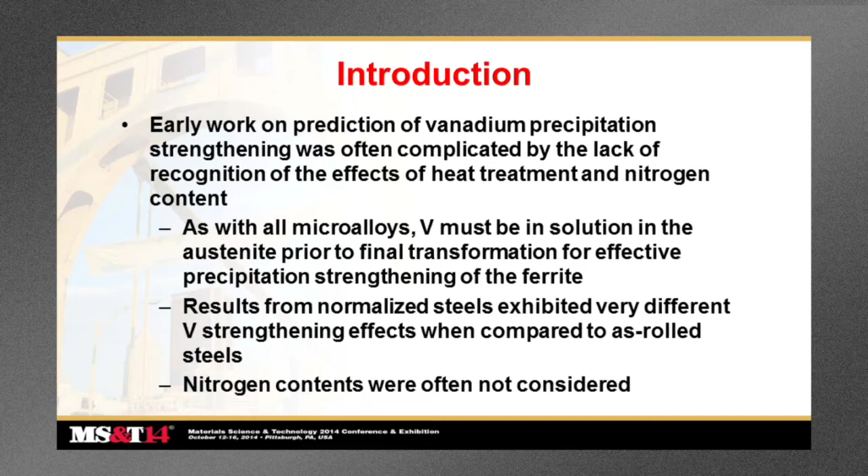Early work on prediction of vanadium precipitation strengthening was often complicated by the lack of recognition of the effects of heat treatment and nitrogen content. As with all microalloys, vanadium must be in solution in the austenite prior to transformation for effective precipitation strengthening of the ferrite. Results from normalized steels exhibited very different vanadium strengthening effects when compared to as-rolled steels, and often nitrogen contents were not considered.

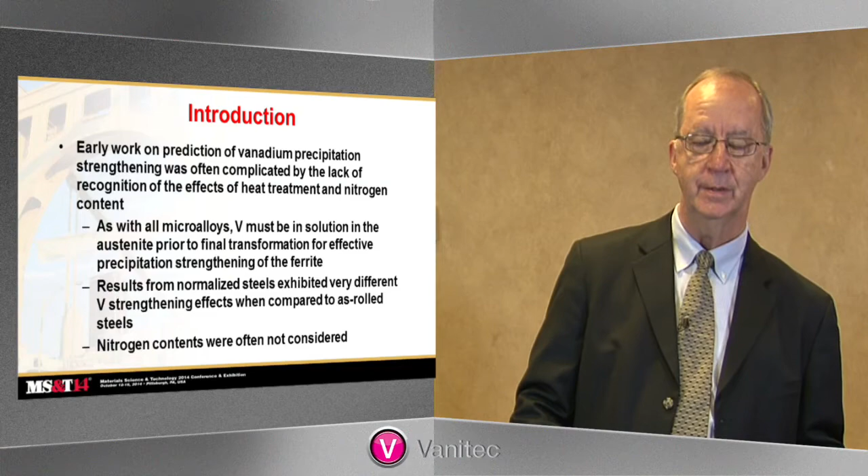This resulted in some somewhat different perspective of what the strengthening effects of vanadium additions were, certainly some confusion and misinterpretation of data that was available.

Grozier in 1975, at the Microalloying 75 Symposium, really started microalloying, which Mike Korchynsky was a very prominent contributor to. In that conference, Grozier presented some of the first results of extensive production of vanadium strengthened hot rolled strip steels. In there, a graphical model was used to describe the effects of vanadium and nitrogen on the as-rolled yield strength. This strength model was first published by Korchynsky and Stuart in 1970.

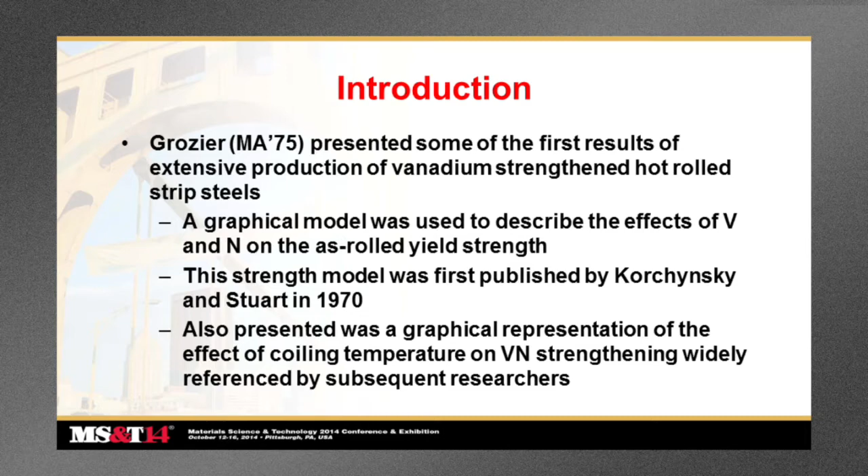Also presented in that conference was a graphical representation of the effect of coiling temperature on vanadium nitrogen strengthening, which has been widely referenced by subsequent researchers over the years.

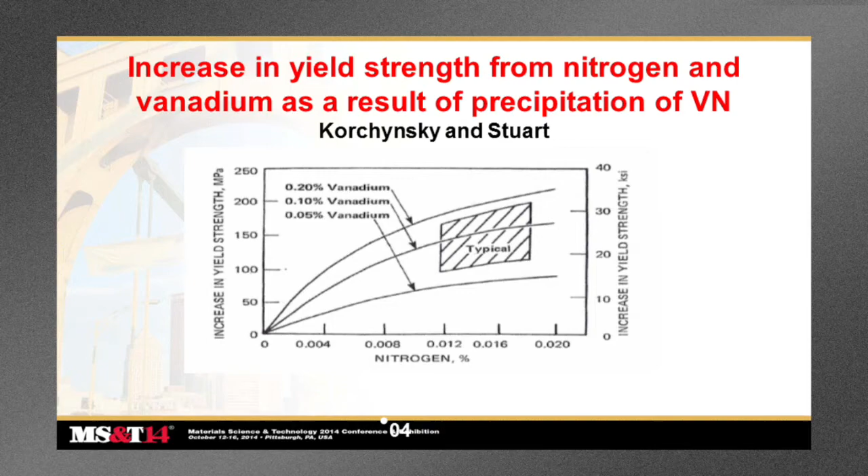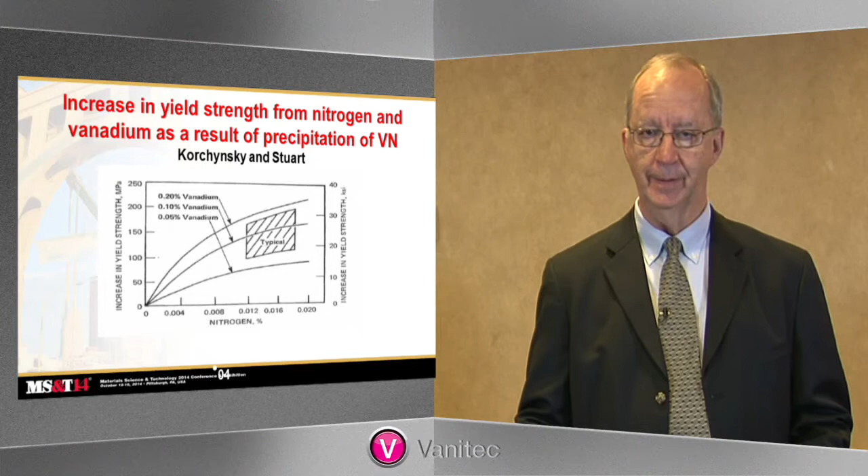This is the graph first published again by Korchynsky and Stuart, showing the strengthening effect, that is the increase in yield strength as you see on the left, for increasing nitrogen levels, for three different levels of vanadium addition. This again is quoted and cited widely over the years as being the first real representation and information to the industry that the vanadium nitrogen system could be very effective.

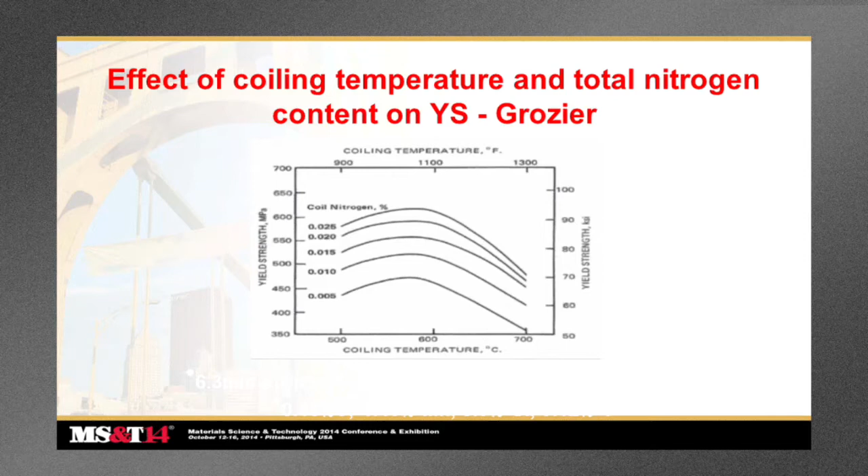But the problems with this graphical model, the first graph that I showed, included a number of things. First, there's no vanadium strengthening apparent at 0% nitrogen. In other words, hypothetically, a 0 nitrogen steel would still have some strengthening from a vanadium addition because presumably carbon would be available interstitially.

But in this graph, it doesn't represent that. It all starts from the 0 point. Forcing these curves to start at the 0 point causes the nitrogen strengthening slopes to be considerably different depending on the vanadium level. The nitrogen strengthening rate, therefore, varies significantly at these different levels, which isn't necessarily consistent with what subsequent research has shown.

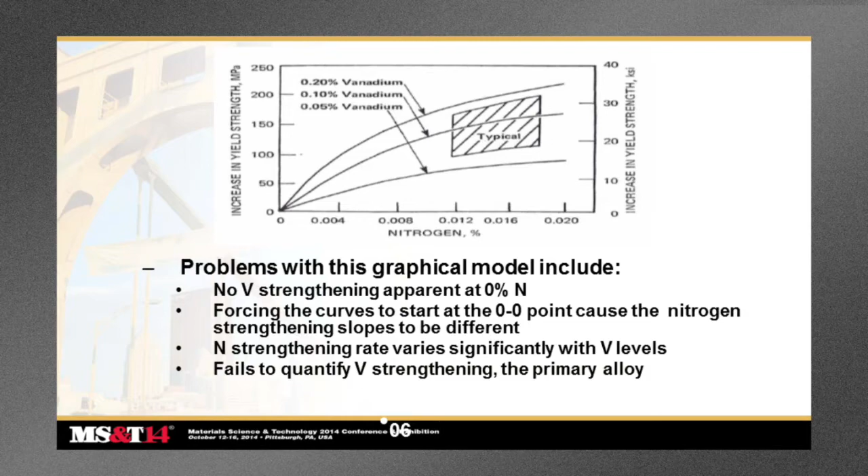It also fails to quantify vanadium strengthening, which is the primary alloy being used by the metallurgist in their alloy design. They need to know how much vanadium they need to get to the strength that they want. And it's difficult to tell from this curve simply because vanadium content is not one of the variables of the graph.

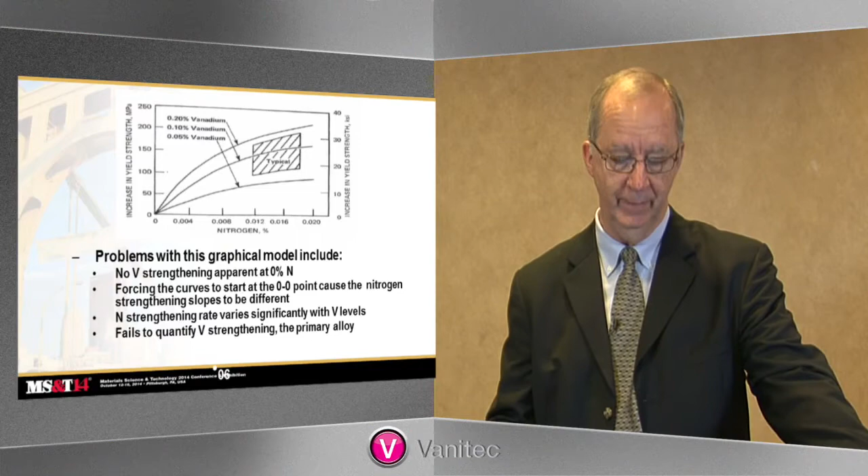Subsequent to that work, there's been much more work - I will refer to the work by Siwecki and others on nitrogen, the effect of nitrogen on precipitation strengthening. In this case, a 0.12 carbon, 1.35 manganese material, as you see, with aluminum and 0.09 vanadium.

In that case, the graph clearly showed that there was a linear strengthening response to the increasing nitrogen levels, and that this slope was consistent with different processing variables, which changed the absolute strength level, but the strengthening increase from the nitrogen contribution, as you can see, as we go from 50 to 120 to 180 region, that strengthening contribution was consistent across all of these processing and cooling rate conditions.

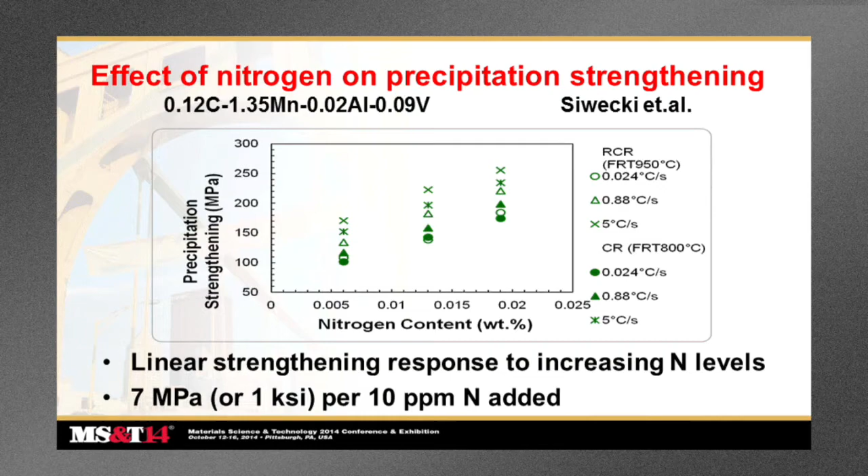This rate of strengthening was about 7 megapascals, or 1 KSI in inch-pound units, per 10 ppm nitrogen added. It turns out that this number has been repeated time and time again by multiple researchers and also many commercial applications of this alloy system - that 7 megapascal increase in strength for 10 ppm nitrogen added, as long as it's substoichiometric to the vanadium nitrogen stoichiometric ratio.

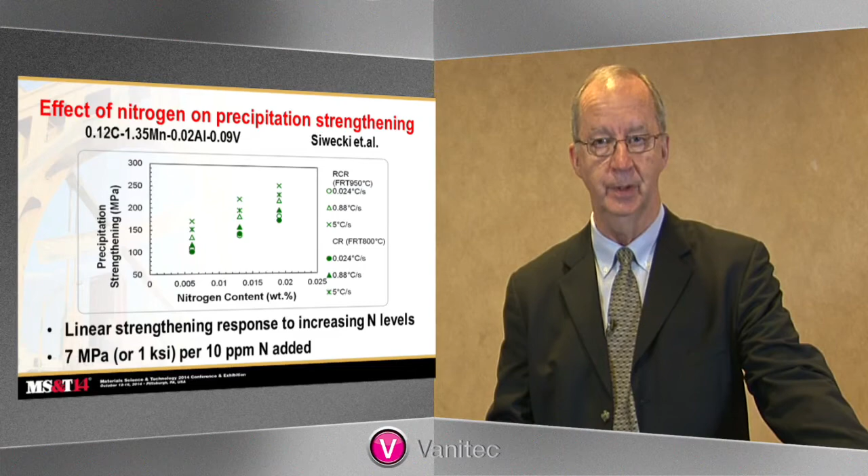The objective for improving the model then was to develop a descriptive graphical model of vanadium nitrogen strengthening that would have visual impact for sure, and also that vanadium should be the primary variable, so you can then quantify the relative effects of vanadium and better design your alloy content.

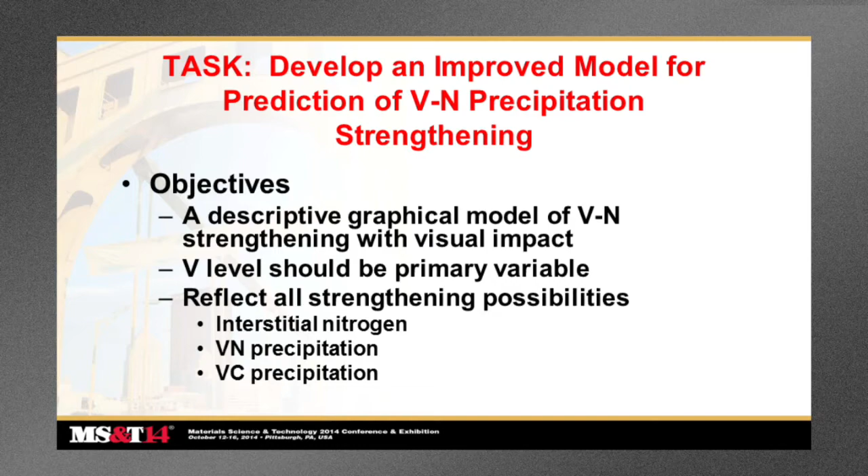And it should also reflect all strengthening possibilities, and those include vanadium nitride precipitation and vanadium carbide precipitation, and of course, therefore, has to be a function of the presence of both interstitial nitrogen and carbon.

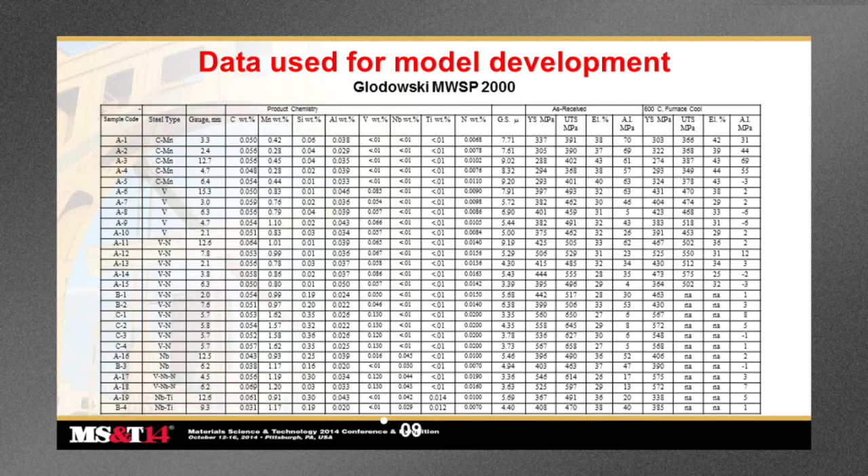Data used for model development included this information. I don't intend to go over that, just to show you roughly the kind of information that's available. It is not intended to be analytically rigorous, but simply to generate a descriptive model that could be used across many different applications. The regression results, as shown, again, were not necessarily rigorous, but they were compared with many different actual production data sets and found to be very descriptive of what is actually being observed.

And it also agrees with this 7 megapascals per 10 ppm nitrogen level addition that would be expected to get with the nitrogen assistance to the vanadium precipitation.

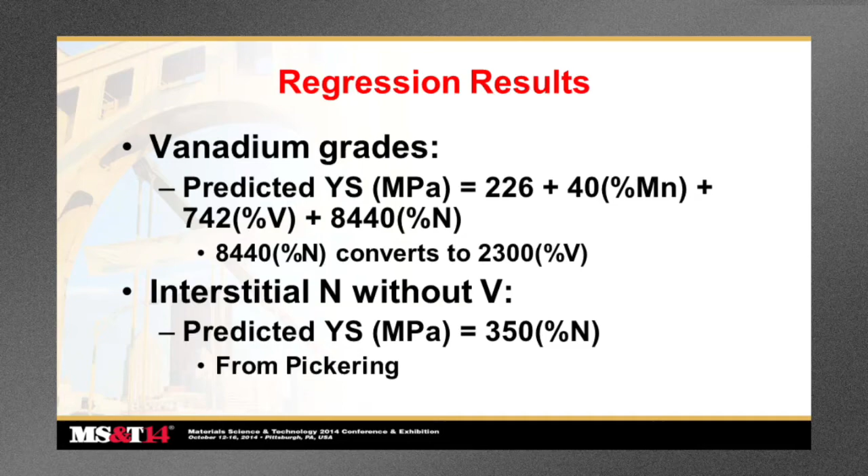You also had to develop this model, had to develop some prediction of what the effect of interstitial nitrogen might be without precipitation. In other words, if you have nitrogen without vanadium, what kind of strengthening could you get? We used the model that was suggested by Pickering, as you see here. I think subsequent to this, there is strong evidence that says that model probably underpredicts the interstitial nitrogen strengthening component, but nitrogen strengthening, interstitial nitrogen strengthening is not something that would normally be recommended, and so it's not a major issue with the predictive model.

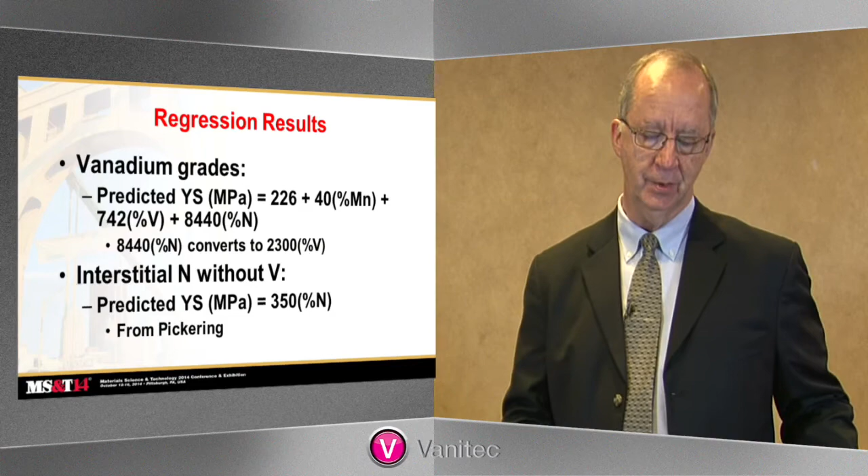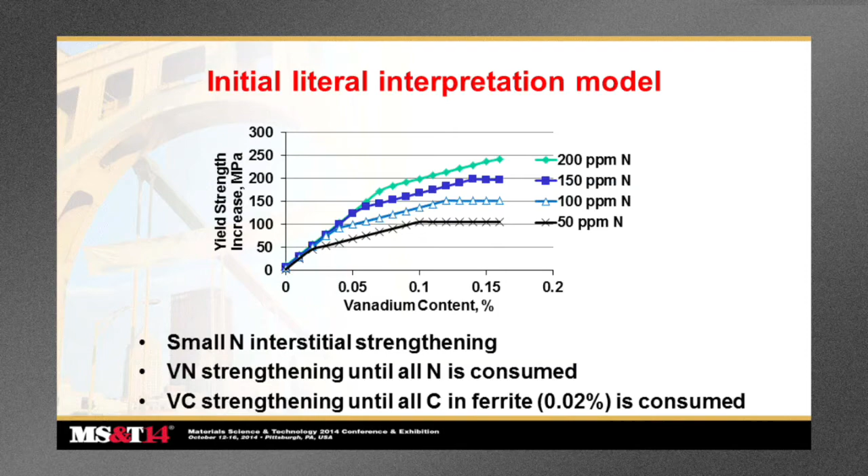Now, there can be many different carbon levels of steel that you can use this system with, but we have to remember that it's only the carbon in the ferrite that will precipitate and give you vanadium carbide strengthening. Precipitation of vanadium carbide in the austenite, if it happens, which is not particularly likely anyway because of the high solubility of vanadium carbide, but even if it did, it would not contribute to strengthening.

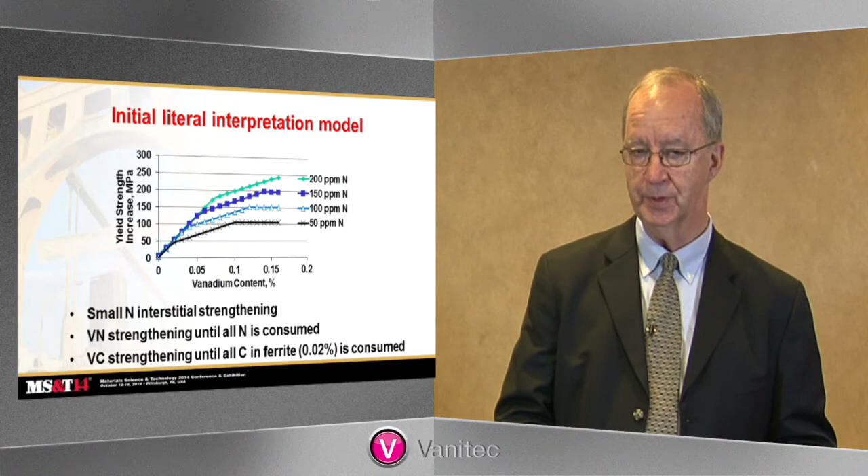So you have the first slope, which is vanadium nitrogen strengthening. The second slope is vanadium carbide strengthening, but we have to remember the maximum solubility of carbon in iron ferrite is about 0.02%. So you can also run out of carbon. So eventually, stoichiometrically, you will run out of carbon as well. So you first can form vanadium nitride, then vanadium carbide, and then there is really no other interstitial element left for the vanadium to precipitate to contribute to precipitation strengthening. So it simply stays in solution and the precipitation strengthening component essentially stops.

Now looking at that literal model, as I called it, and comparing it to the Korchynsky model on the right, you can see at roughly the same axis of yield strength increase on the left, that in fact they're very similar. Of course we have now exchanged, we put vanadium content on the lower axis rather than nitrogen content, which then allows you to be predictive in how much vanadium you want to add, and we do that at various nitrogen levels to give you an idea where you need to be with nitrogen content when you're done.

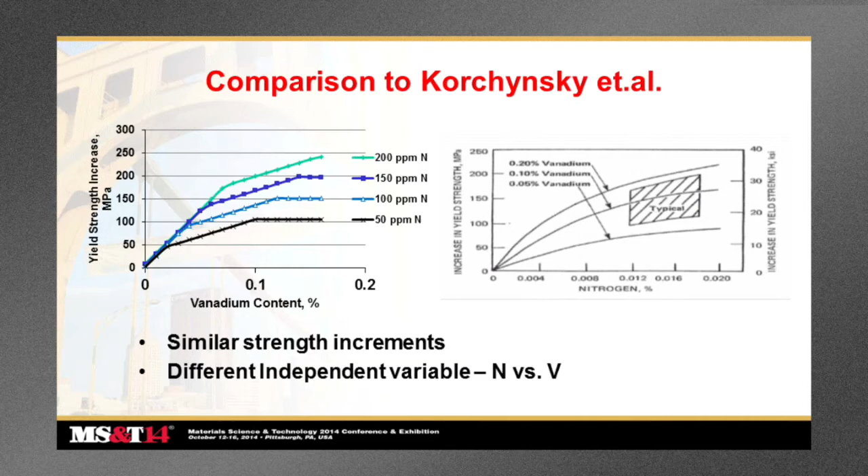As you can see, the more vanadium added, the more nitrogen is needed to make maximum use of the vanadium that you have. Some important points from this vanadium strengthening graph: again, it provides a quick method to estimate vanadium requirements based on incremental strength that you are looking for. It demonstrates the importance of managing the nitrogen level. It reaffirms the fact that precipitation strengthening requires both vanadium and either carbon or nitrogen to be effective.

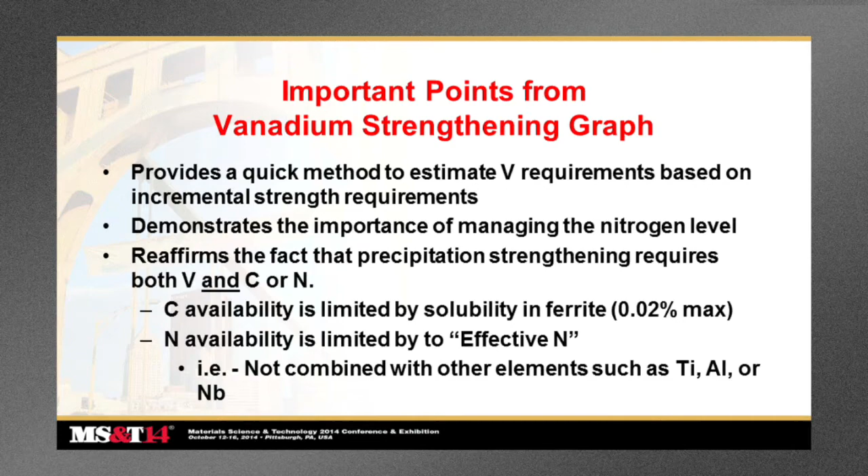Carbon availability is limited by the solubility in ferrite, typically 0.02% max. Nitrogen availability is limited to what the effective nitrogen level is. In other words, it's not necessarily just the total nitrogen, because other elements may combine with the nitrogen prior to it being available for vanadium nitride precipitation in the ferrite.

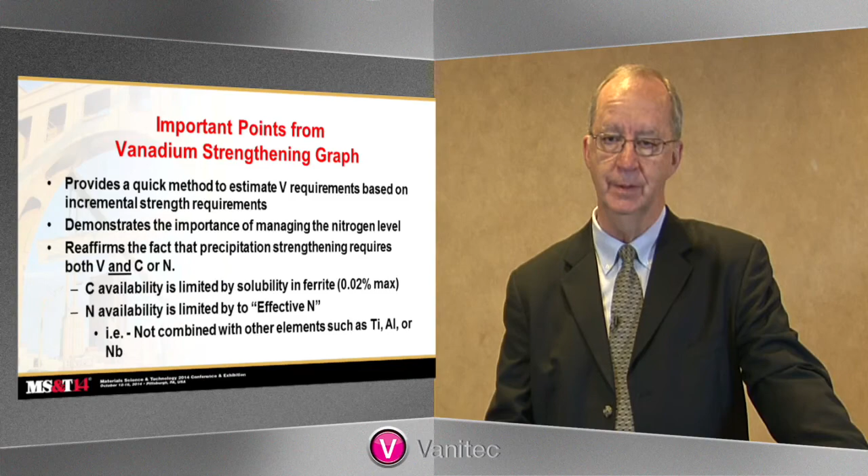The elements that compete with vanadium for combining with nitrogen are titanium, aluminum and niobium. For valid application of this model, we have to keep certain things in mind.

You have to be looking at a situation where all precipitates must be in solution in the final reheat. That means the reheat temperature should be high enough to get all of the microalloys in solution, certainly all the vanadium in solution that you're looking for the precipitation strengthening. However, things like titanium, you may never get back in solution once the steel is solidified. But it does mean the reheat temperature probably has to be much higher than normal austenitizing temperatures for heat treatment, such as normalizing.

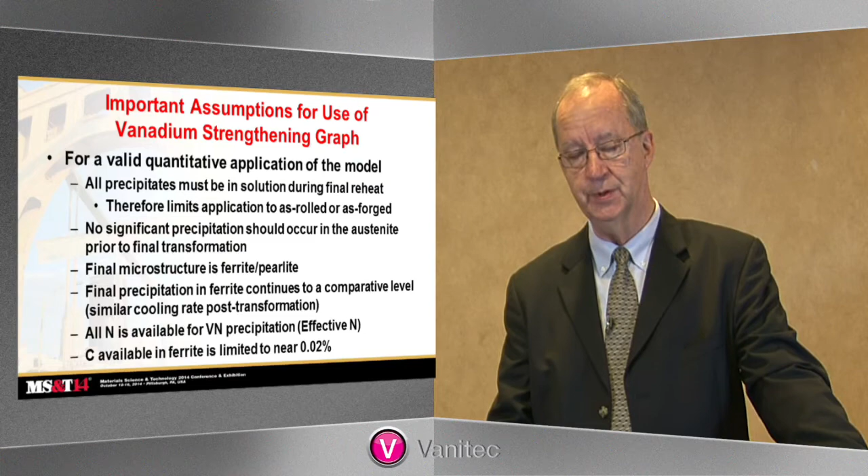So when you normalize material, you can't expect to get the kind of response from vanadium nitrogen precipitation strengthening as we see in this model. It pretty much limits the model to use in as-rolled or as-forged conditions. But that is primarily where microalloying is used, so it's really not an issue, you just have to be aware of that.

Also, no significant precipitation should occur in the austenite prior to final transformation to be able to get this precipitation strengthening. The final microstructure is a ferrite-pearlite microstructure. Final precipitation in ferrite continues to a comparative level. In other words, the processing should be very similar, with similar cooling rate after the transformation has completed.

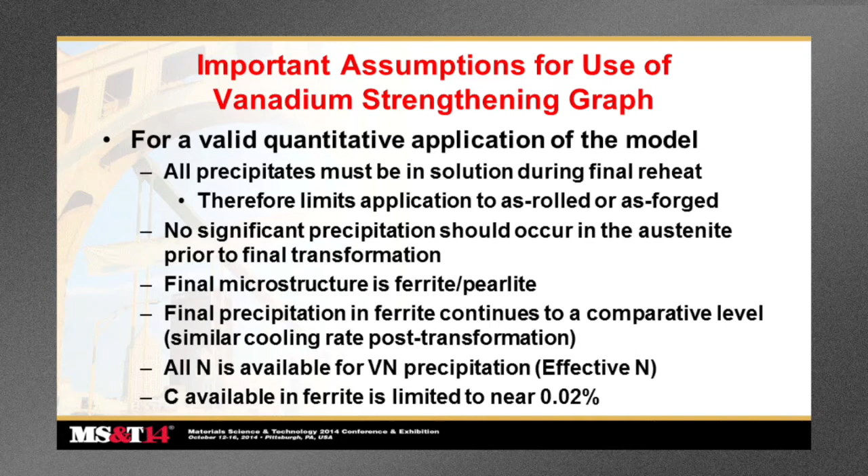And all nitrogen that you presume to be part of this model is in fact effective nitrogen, that is, it is available for vanadium nitrogen precipitation. Carbon availability in ferrite is generally limited to 0.02%, but we will talk about an example where they may be higher than that. This, in fact, is that example.

So you get a ferrite-pearlite kind of structure, but with higher carbon levels you can have higher hardenability, therefore lower transformation temperatures, potential supersaturation of carbon in the ferrite, and therefore a higher driving force for vanadium carbide precipitation and more carbon being available.

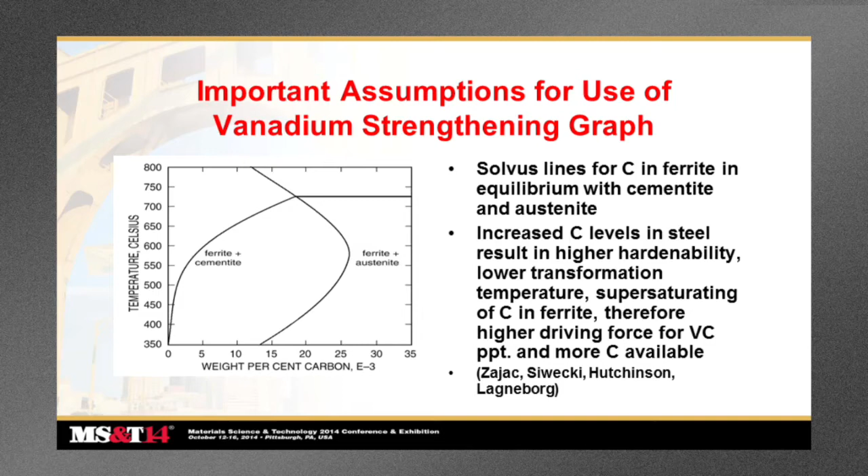As a result of this supersaturation of carbon in the ferrite, you may extend the vanadium carbide strengthening component to higher vanadium levels. So the rate of strengthening will still remain the same as shown in that curve, and the nitrogen strengthening component, the 7 megapascals we quote, is still relevant and appropriate for these intermediate carbon levels. The differential increase you can get with nitrogen, as long as it's substoichiometric to the VN ratio, is always consistent near that 7 megapascals if appropriately processed.

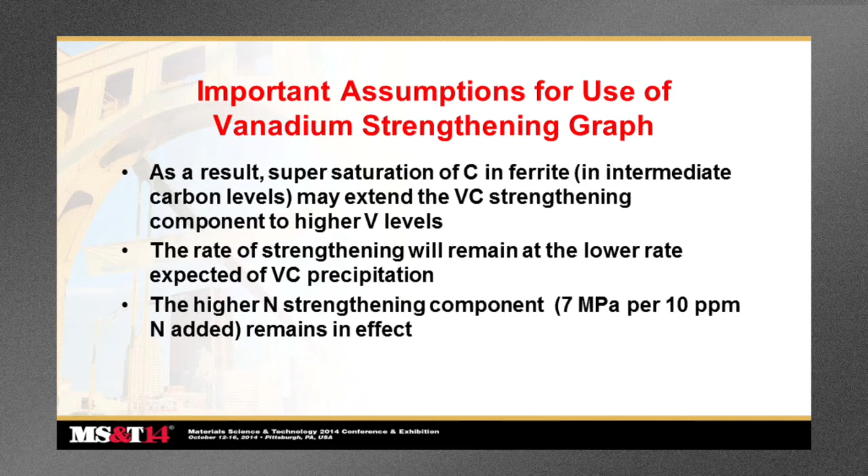One of the things we've seen with this modeling is that it really isn't critical whether the precipitation is interphase or random. It still quantitatively contributes to strengthening at about the same predictable rate.

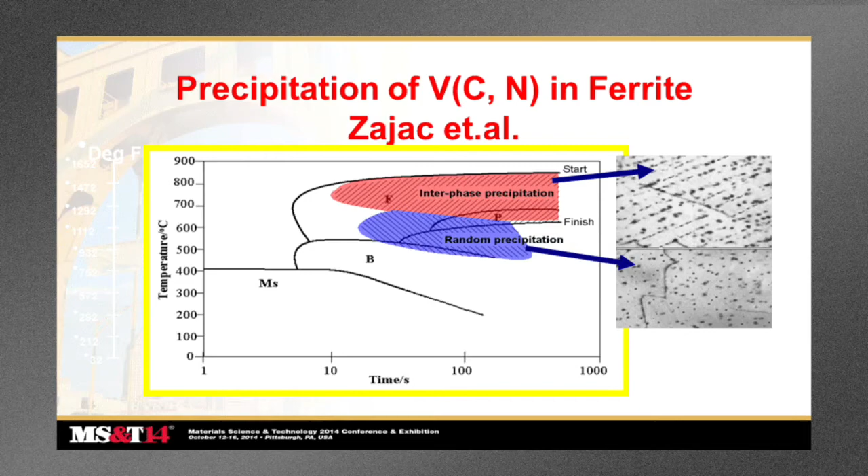However, looking at this curve reminds us of a couple of things. One is that precipitation in the austenite, prior to reaching these transformation lines up in this zone, does not contribute to strength. The second is that the precipitation strengthening does occur at a relatively high temperature, and there is a temperature below which precipitation of vanadium carbonitrides will cease, and you no longer get any effective strengthening if it has not precipitated at the appropriate time.

Typically, most researchers looking at production kind of processing times and temperatures find that anywhere from 50 to 70% of the vanadium will precipitate if there's ample nitrogen available.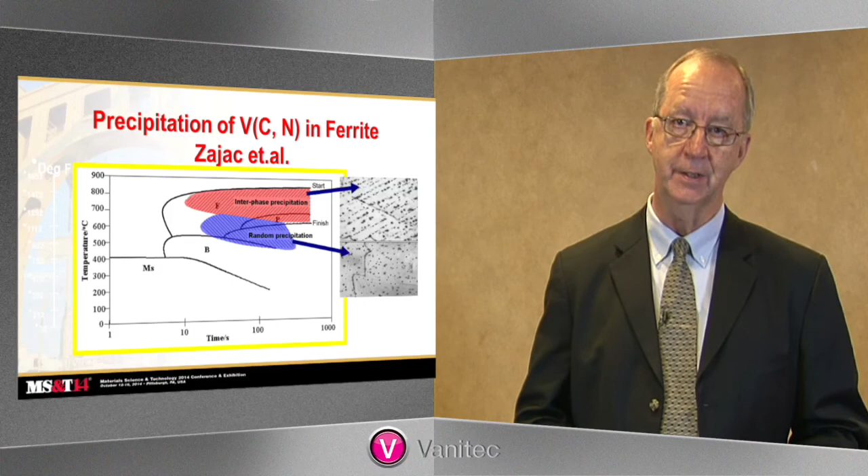If it's only carbon available, typically that number is less than 50%, maybe 20 to 40. That is the primary reason why you see the differential strengthening rates between the vanadium nitride and the vanadium carbide.

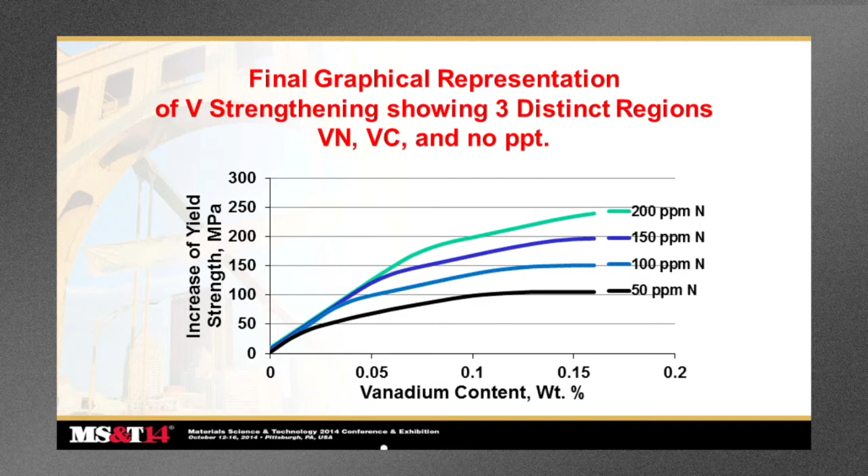We know that nature doesn't work in straight lines, it works in curves. If you tried to generate this model based on actual production data, it would be very difficult to determine where these inflection points are from vanadium nitride to vanadium carbide to vanadium nothing, because there's nothing available. What you'll see is more or less a continuous curve gradually approaching a zero strengthening rate. These inflection points are rounded off in this graph to better represent and estimate what you'll actually see when doing alloy design based on a vanadium nitrogen system.

So the intent of this representation is to provide usable information to those alloy designers out there that want to use vanadium in the most appropriate and cost-effective way.

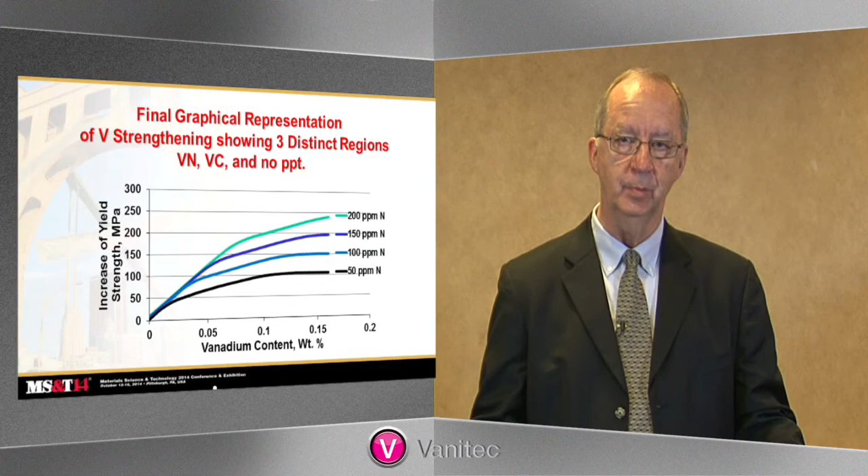Now let's talk a little bit about the solubilities, the relative solubilities of these carbide and nitride formers. This is the classic solubility curve for each of the primary microalloys: vanadium carbide, vanadium nitride, titanium carbide, titanium nitride, niobium carbide, niobium nitride, and aluminum nitride.

As you can see, of all the nitride formers, vanadium nitride is the most soluble. Niobium nitride is next, less soluble. Aluminum nitride is even less soluble for the most part than niobium, but very similar. And then you have titanium nitride that precipitates pretty much on solidification of the steel. It is extremely difficult to get back into solution.

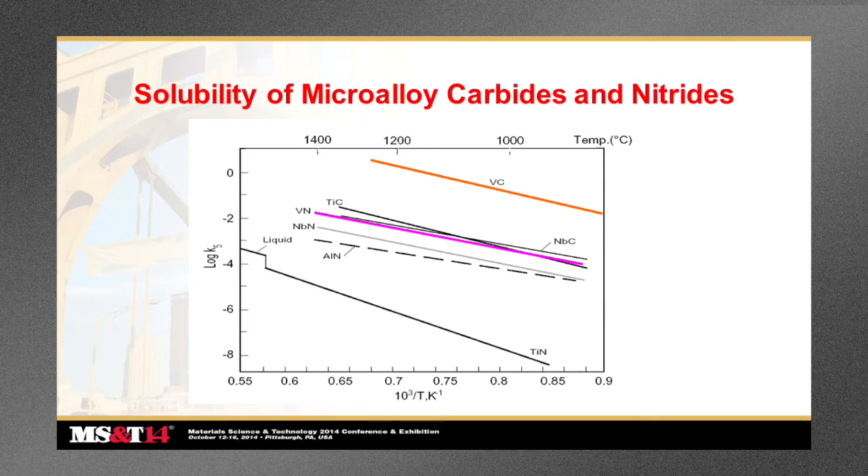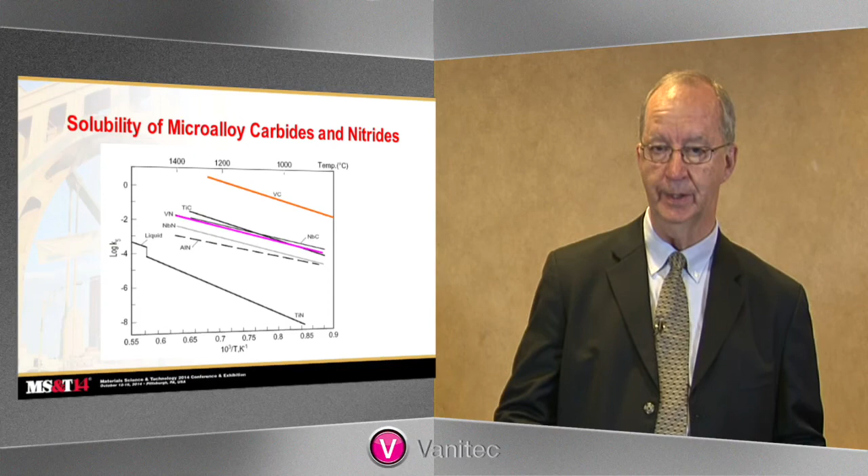So what this quickly shows you is that you are at high risk. If you have any of the other microalloys contained in the steel along with vanadium, you are at high risk of losing that nitrogen to a competing element. So when you look at this strengthening model we just developed, you must determine what nitrogen is truly available. You have to look at the prior processing history and determine how much nitrogen is actually available to precipitate with the vanadium nitride, and from that you can predict what kind of strengthening you might expect to see. Let's look at each of these elements specifically.

We know that titanium nitride can form at a very high temperature. It results in a direct loss of effective nitrogen for vanadium nitride precipitation. Basically you can use a stoichiometric calculation of titanium nitride formation and presume that virtually all of that nitrogen will not be available and will not be part of the effective nitrogen available to the vanadium.

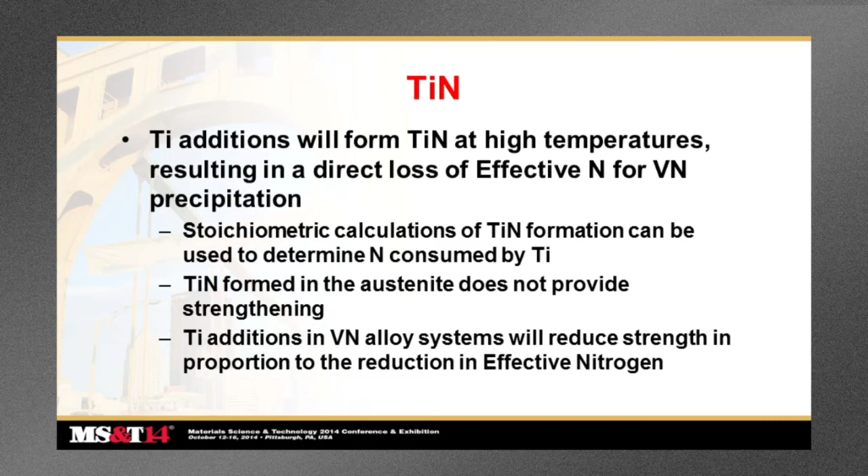The titanium nitride formed in the austenite does not provide strengthening. Virtually all of the titanium nitride forms in the austenite. It tends to be very coarse, not a strengthening size precipitate. Therefore, titanium additions in a vanadium nitrogen system actually reduce the strength in proportion to the amount of effective nitrogen removed. They can possibly be an effective high temperature grain growth controlling precipitate, but they do not contribute to strength after the fact.

Now, when we look at niobium nitride formation, we know it's less soluble than vanadium nitride or niobium carbide. Therefore, niobium additions will likely precipitate before certainly before the vanadium, and even to some degree before the niobium carbide, depending on the carbon level, of course.

Higher nitrogen levels will tend to precipitate niobium at higher temperatures, removing niobium and nitrogen from solid solution. Niobium nitride will promote co-precipitation of niobium carbide and vanadium nitride in the austenite, which is where you do not want it to occur. So in general, nitrogen tends to reduce the effectiveness of niobium microalloying, although it can raise the T sub NR temperature if that's your desire.

But most niobium alloy designs are optimized with as low as possible nitrogen rather than high nitrogen. Nitrogen combined with niobium in the austenite does not strengthen, and it will reduce the effective nitrogen level.

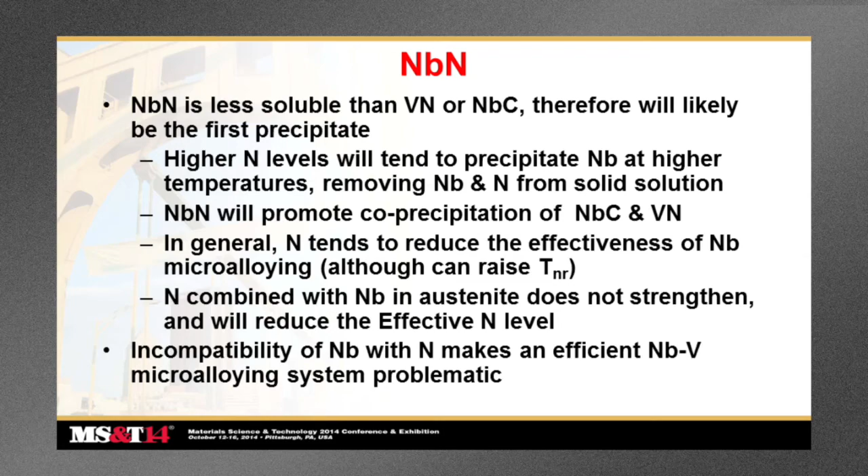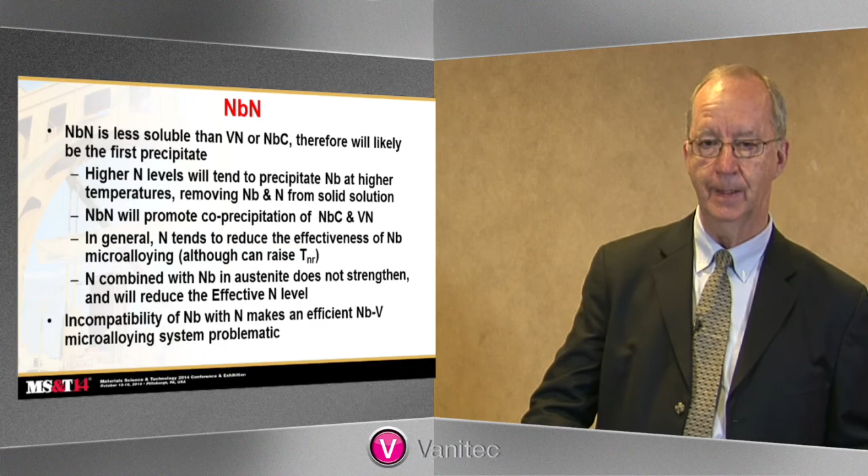This incompatibility of niobium with nitrogen makes an efficient niobium-vanadium microalloying system somewhat problematic, because how do you use the niobium effectively and the vanadium effectively if the niobium combines with the nitrogen before the vanadium, keeping it from forming vanadium nitride, which is what you want for strength. Meanwhile, the formation of niobium nitride actually reduces the effectiveness of the niobium addition in the first place as well. So this lack of synergy between the two is a major issue as we try to make these elements work together, and is something we continue to struggle with.

Here's some examples of the titanium precipitates as well as vanadium precipitates that Yu Li and others have published. The first graph on the upper left shows that in a CSP type operation where the as-cast slab is equalized at 1050 C, these precipitates quickly form and do not dissolve. In fact, because of the pre-existence of the titanium nitride that forms on solidification, vanadium then tends to co-precipitate vanadium nitride around those precipitates.

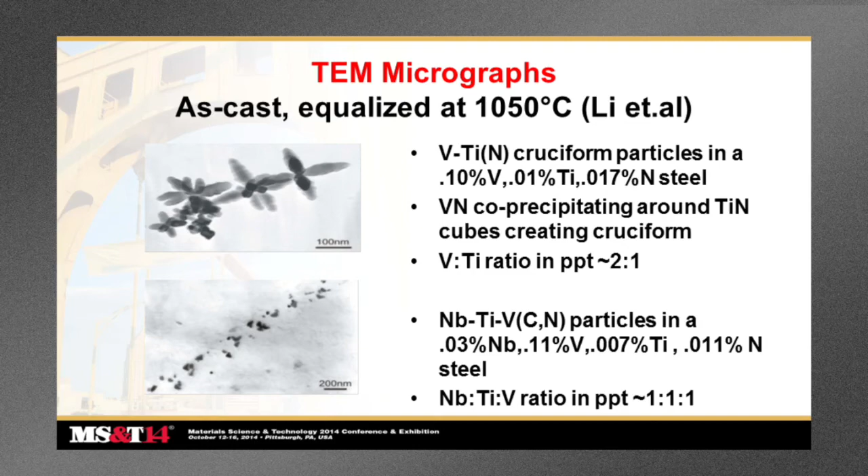Again, taking vanadium and nitrogen out of the system in the austenite where it will not be effective for strengthening. Similar things happen when you combine a niobium and titanium system. You get these precipitates, somewhat lower magnification. These are also relatively large precipitates that don't effectively contribute to strength, and they remove the microalloy that you've added from solution in the austenite, therefore not contributing to precipitation strengthening of the ferrite.

Now, aluminum is also routinely used for deoxidation and meeting fine grain requirements on many of these steels. Aluminum nitride has a lower solubility than vanadium nitride, but aluminum nitride formation is very sluggish on the cooling process. Aluminum nitride does form quickly during a reheat cycle, so conditions during the process where you go through a cycle of cooling down and then reheating, such as on the slab surface during casting, or slab or bloom reheating during, say, the equalizing furnace in a CSP mill.

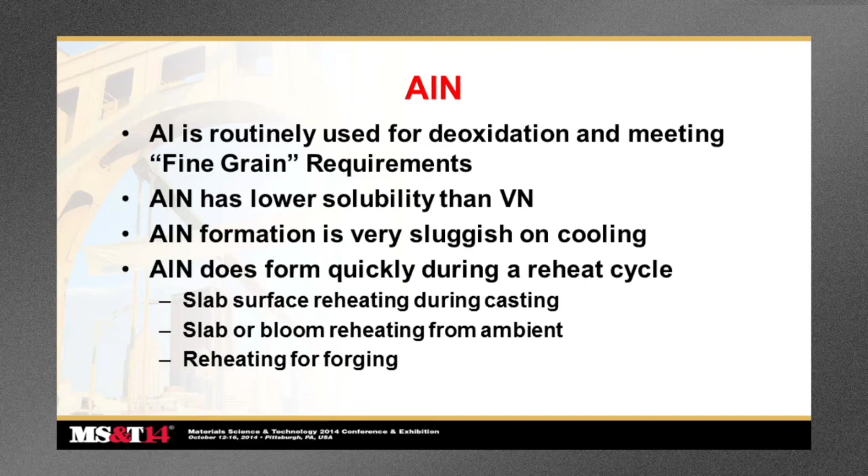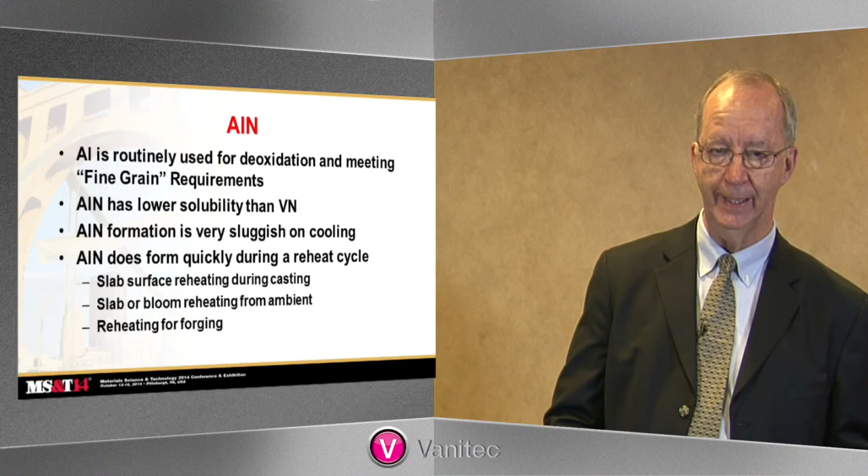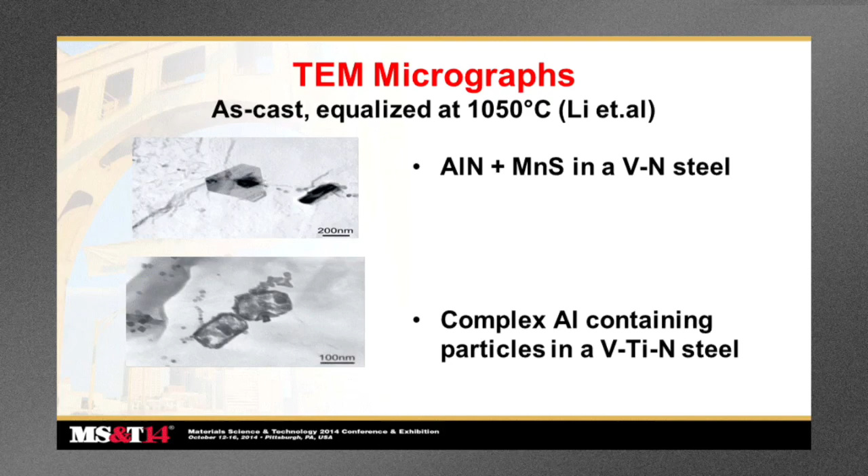All of those are places where aluminum nitride might precipitate, and if it does, it again steals the nitrogen away from the vanadium and is no longer effective for vanadium nitrogen strengthening. This is an example of aluminum nitride formation in a vanadium nitrogen steel and also in a vanadium titanium nitrogen steel, where the aluminum nitride forms and at this point contributes nothing to properties. It does not provide a grain refiner because the grains are already large in this case, and it steals nitrogen away from the vanadium nitrogen system.

Here's another example of the effect of aluminum on interfering with the vanadium nitrogen system. This is work done by Rothleutner and Van Tyne, where they did forging simulations using a base alloy of 0.37 carbon, 0.09 vanadium, and 0.015 nitrogen, with two aluminum levels, 0.006 and 0.031 percent. They varied the forging reheat temperatures and times to get various amounts of aluminum nitride formation in the austenite prior to forging and cooling.

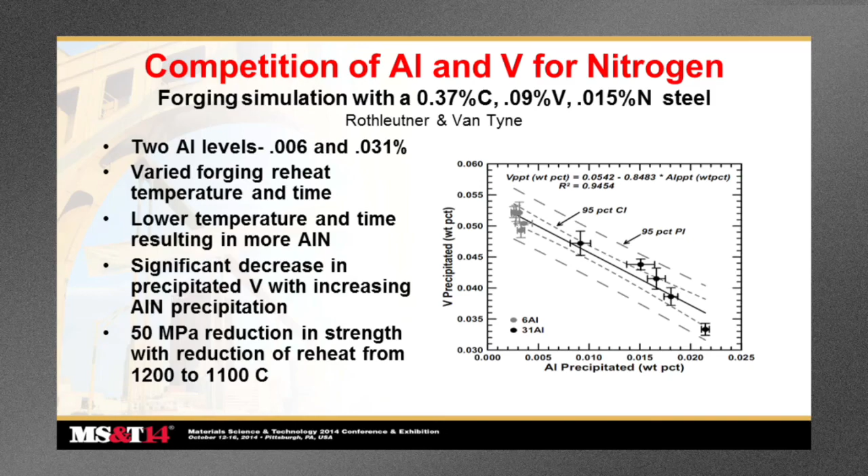What they found, as you can see on the graph, is that as the amount of aluminum that precipitated increases, the amount of vanadium precipitate that occurred decreases. So it was clear evidence of aluminum stealing nitrogen away from the vanadium and reducing the amount of vanadium precipitation, therefore lessening the vanadium nitride precipitation strengthening. In fact, they measured up to a 50 megapascal reduction in strength simply from reducing the forging reheat temperature from 1200 to 1100 C.

We also know that aluminum nitride formation during casting contributes to cracking during unbending. It can contribute to edge cracking in a CSP type operation, where the first roll pass on a thin slab direct rolling process tries to deform the as-cast austenite grain boundaries. If aluminum nitride has formed on those grain boundaries, there will be a significant ductility loss. Aluminum nitride must be dissolved completely prior to rolling, which increases the reheat requirements, a difficulty in a CSP mill.

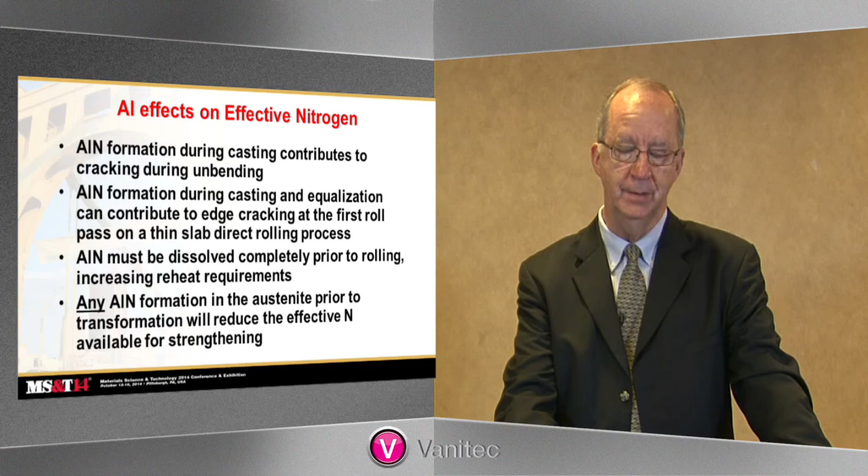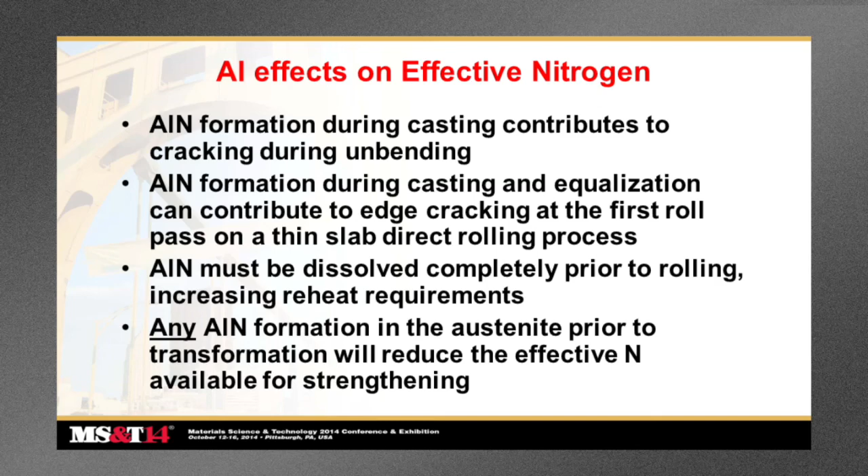Even Grosser, in Microalloying 75, pointed out that to get the appropriate strengthening from a vanadium nitrogen addition in a conventional slab operation, care must be taken that the slab reheat temperature is sufficiently high to get the aluminum nitride in solution. So any aluminum nitride formation in the austenite prior to transformation will reduce the effectiveness of the vanadium nitrogen strengthening component you're looking for.

So we know that aluminum does not contribute to grain refinement in as-rolled steels, which is primarily where you use any microalloying system, as-rolled or as-forged. Therefore, adding aluminum to meet any fine grain requirement is in fact irrelevant and unnecessary. Yet it seems very common throughout the industry to request aluminum fine grain material, which in the as-rolled condition is in fact meaningless.

We also know that a minimum aluminum, say 0.020, is not always necessary to adequately deoxidize steels. In fact, the vanadium nitrogen system is widely used in the long product arena, where it's typically silicon killed and no aluminum is added. So we know you can cast steels with lower levels of aluminum than 0.020, or perhaps what has traditionally been accepted throughout the industry today.

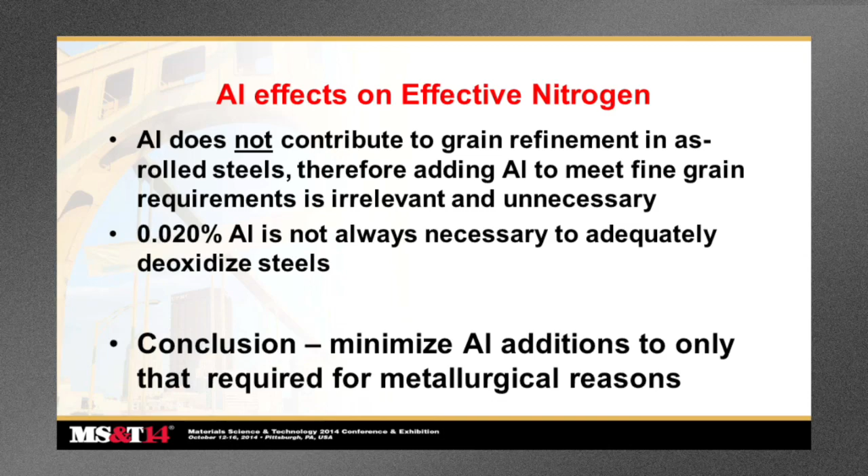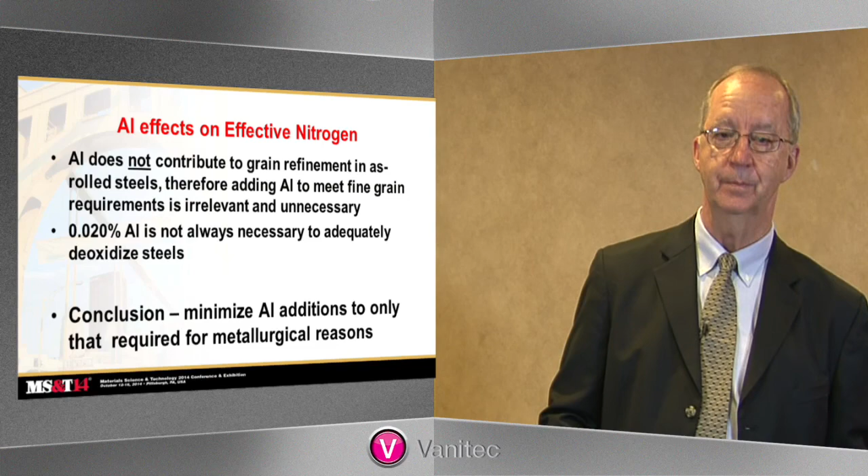So the conclusion is that if you're using a vanadium nitrogen system and want to achieve strengths as predicted by the model we are proposing, you should minimize the aluminum additions so that you're only using the amount required for metallurgical reasons. This includes primarily deoxidation, because grain refinement in an as-rolled ferrite pearlite structure is mostly controlled by the process conditions, not the addition of aluminum.

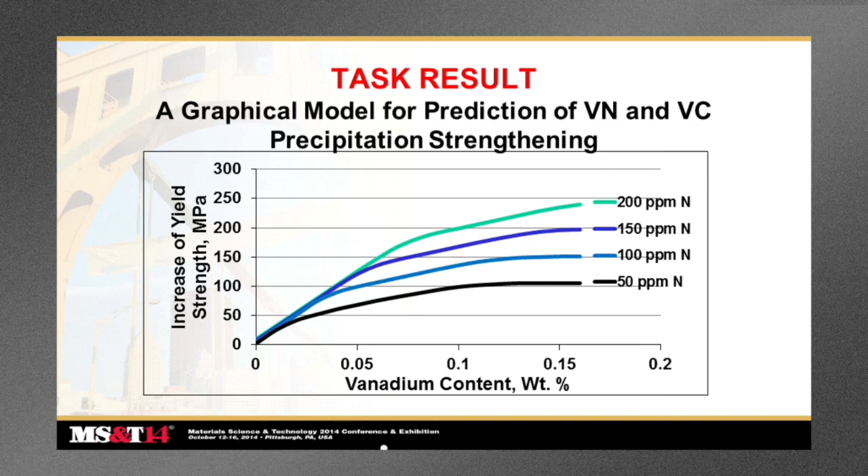So in the end, we have this model that we propose should be used to best explain and to make the first level of prediction of what kind of strengthening you can get from a vanadium nitrogen system in a product that is hot rolled or hot forged and ends up in a ferrite pearlite type of microstructure. Thank you.